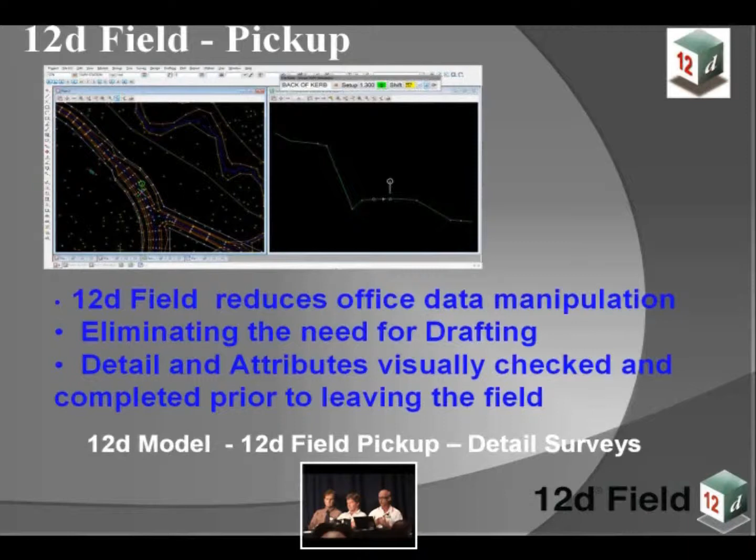12D field pickup reduces data manipulation, eliminating the need for drafting. It can be transferred electronically from designers and so forth, and detail and attributes can be visually checked and completed prior to leaving the field.

With pickup progressing into beta development, 12D Solutions has commenced testing, working with Noel and his crew at the Gold Coast project, and Bundaberg Regional Council with Lindsay Dexter. For detailed surveys, Noel Burton is doing a lot of the map file generation and testing. In coming months, we'll be working with further partners, one I've spoken to today is BCC - Peter Murray from Brisbane City Council.

I'll just jump into 12D. What I've got here is the main menu. I've been told I'm pushed for time, so...

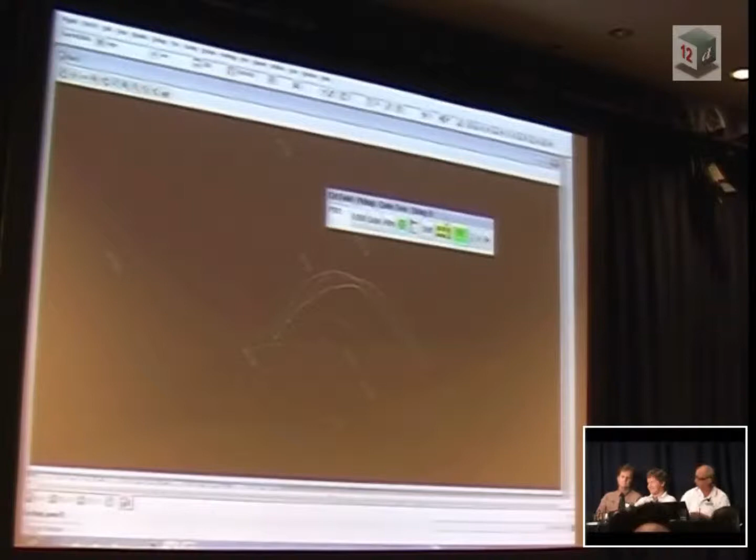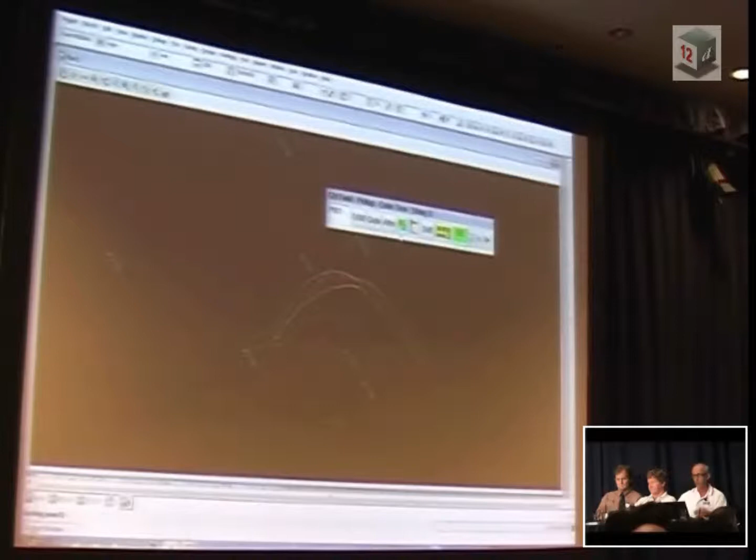I've created a setup. I've got the instrument over there locked on a prism up the back. We can take measurements today to check. You can see here on the screen we have the instrument - we'll just interrupt, go back onto lock, and it will lock back on.

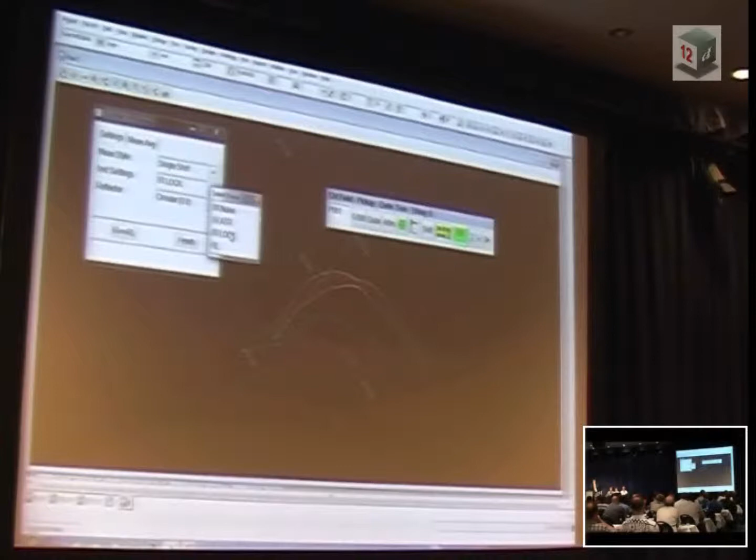The functionality - we can have infrared measurement or reflectorless measurement. In some of the new features coming in version 10, there's a much simpler way of setting up your ATR and your lock. We've got lock on there, so I'll just switch into reflectorless and finish that.

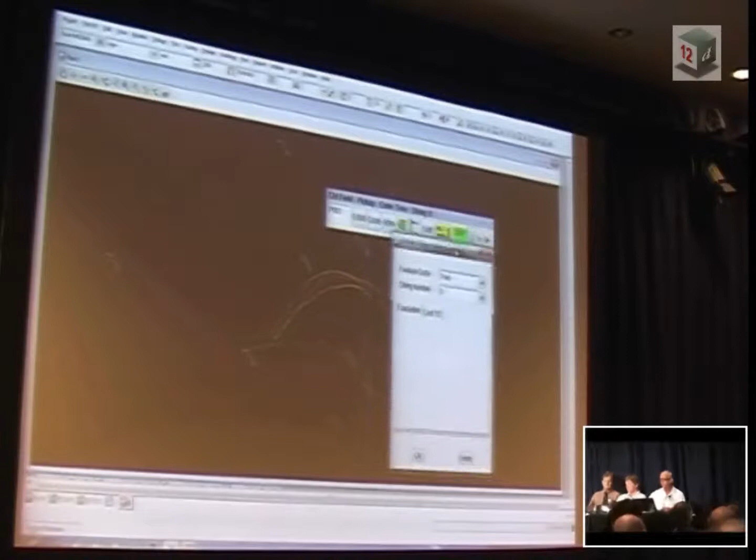With 12D Field, we have a code library. It allows us to create things such as trees. There's quite a number of items on the list so far, and that's growing as we develop the product.

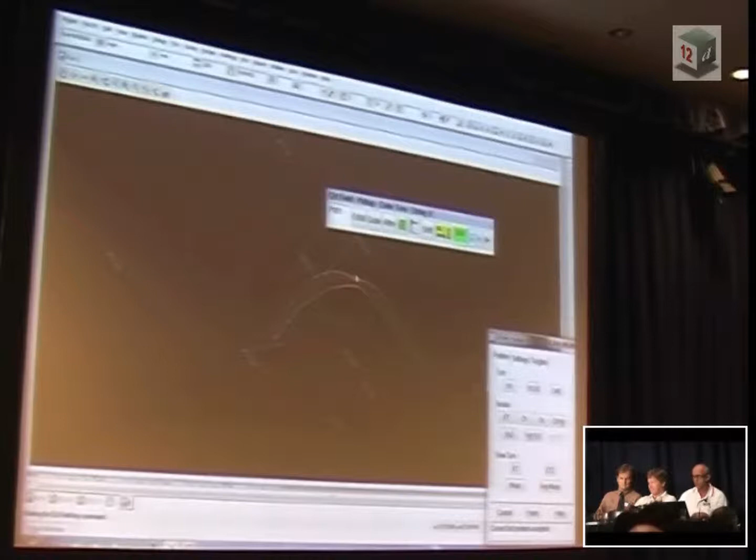I'll drive the instrument across to position of TPS. One nice feature with 12D Field - go to pickup and set it. You can say, I'm standing over here with that little circle, and the instrument will turn around to that position. So no matter if you're working with a raster in the field, you can roughly pick where you are and work from there.

If I take a shot with the instrument, it comes up with the type of tree. We duck into the menu, go to billboards, trees, and pick, say, tree 2 on the trunk menu. For speed, I'll just type it in.

The trunk will say 0.5 diameter. Continue that - the spread. Go for a 10-metre spread on that tree. You can measure that, but I'm just doing it to speed things up at the moment. And the height, of course - you've got the measurement option down here as well.

At the moment I'm just going for the types. The tree height will make it 15 metres high, and continue that. You also have the ability to map the root system and provide other comments for further attributes as you go through the survey.

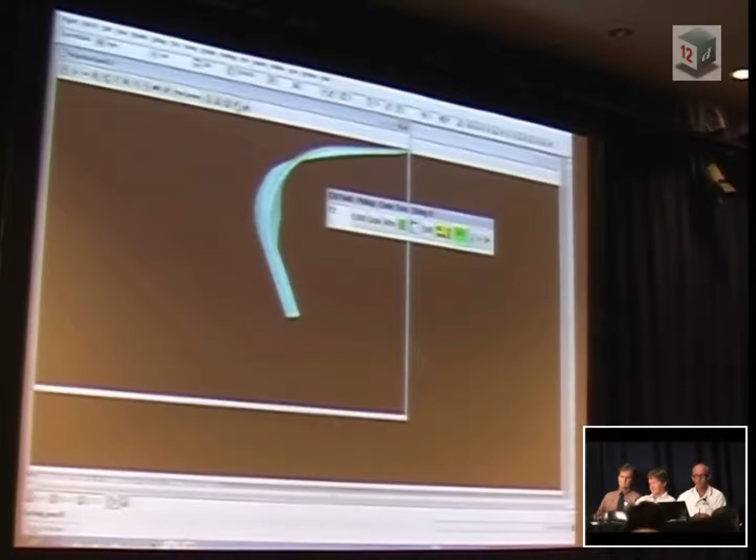Once we continue that, jump into that, and in your perspective view, turn on the model, refresh the screen, and there is the tree drawn.

Some of the options in 12D field pickup - you have station setups, also coming in 12D field setout. You have a standard station, least squares adjustment station, and a station manual. We have the ability to punch in coordinates for the stations, foresight, backsight, so you can traverse it whilst you're doing your pickup surveys.

The ability to record, play, and create template surveys. Opcodes, put in attributes. Shapes will be building up in the future, where you can define a curve shape and then just run that along a single string.

You can edit the field as you go. You can confirm your distances, so if you're measuring to a pole and want to add half a metre or so to get to the centre of the pole, you can add that in. As I said before, you've got the positioning TPS to allow you to turn the instrument to where you're located or where you want to start work from.

The joystick manually controls the instrument, and obviously the status. You can record a note, which is a voice message onto the survey, and we're working towards photos to be recorded onto points and shots as well.

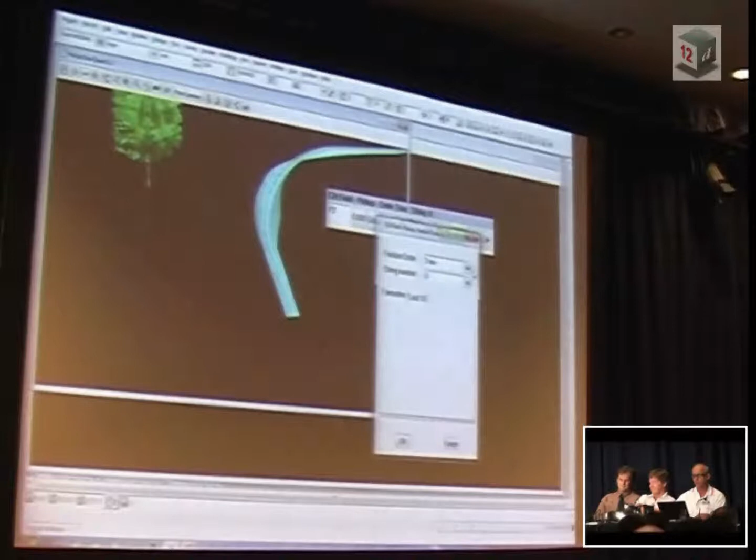So that's the main list. Back to the codes - if I just run into something like a stormwater pipe, created by the invert, give a string number, one. Okay, take a measurement - I've got a pipe under that tree over there.

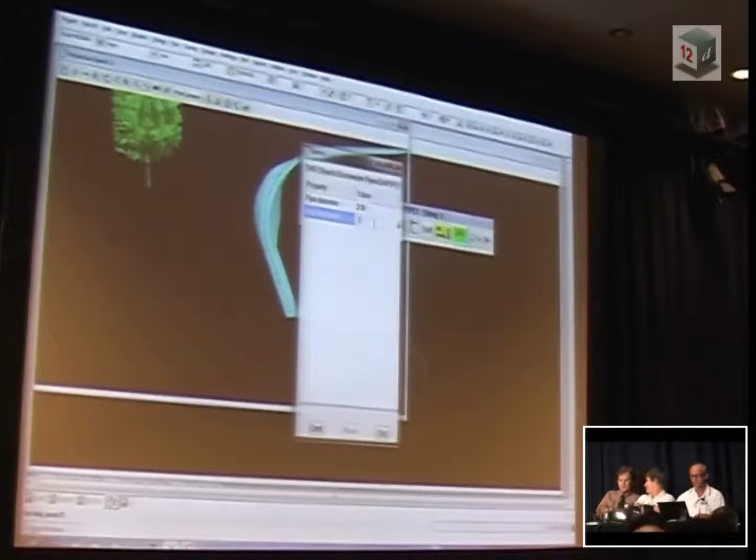Pipe diameter is, say, 2, with a wall thickness of 0.1. Continue - yes. And I'll just move the instrument if I can, to another location.

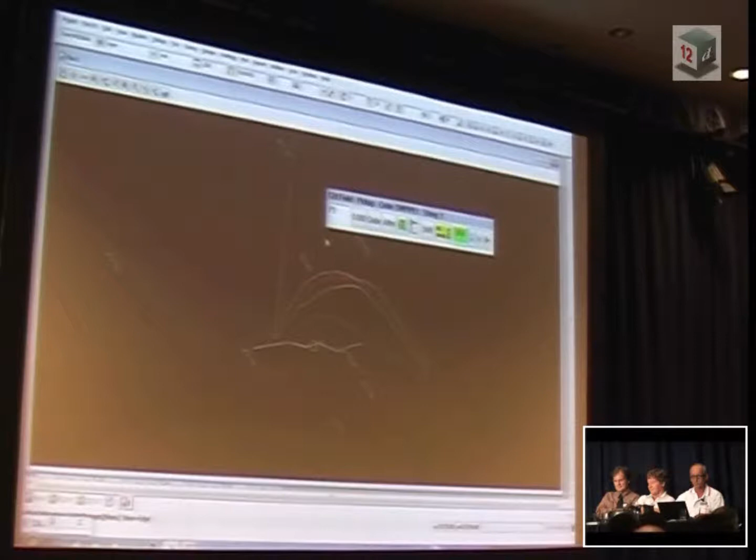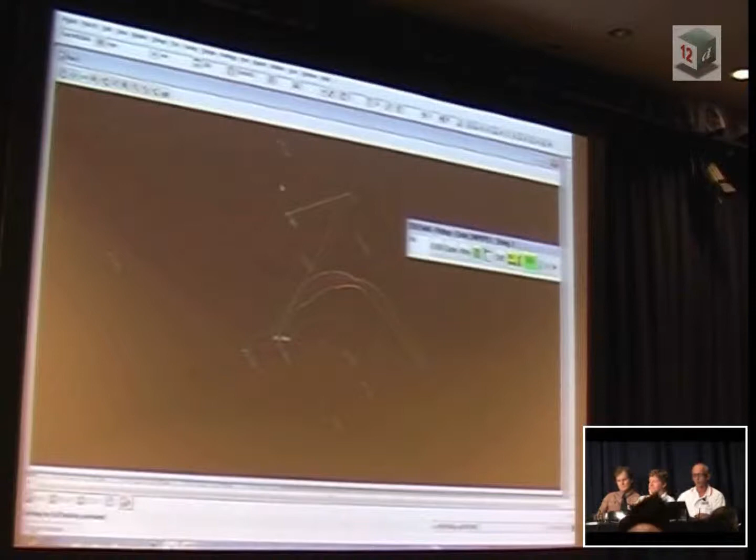Press continue, and then you can turn that onto the plan view. You can see the tree also on the plan view. There's the tree, with the pipe running from the tree, which is a very unusual situation, but that's beautiful. And then you have your pipe sticking out of the tree - very nice detailed survey.

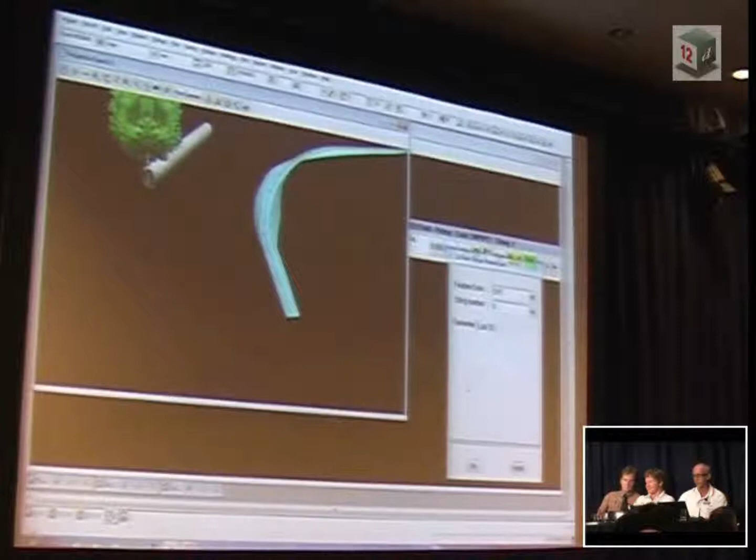We have other things we can add on to that as well. For instance, 12d objects - we can do a circular pit on the end of that position. Take the measurement on that circular pit. It comes up with the same information, which you'll be able to either measure the diameter of the pit, or in this case, because we're running out of time, I'll go for a 3 metre pit. Continue - pit diameter, 3 again. Do a wall thickness of 0.3. Continue.

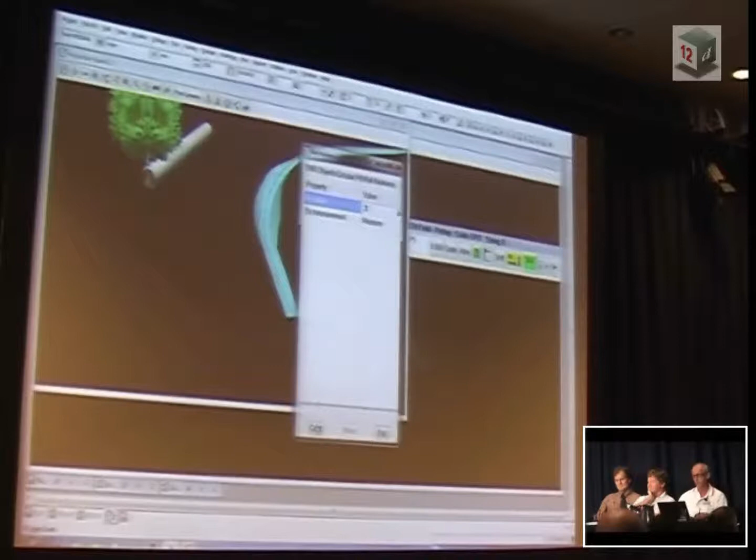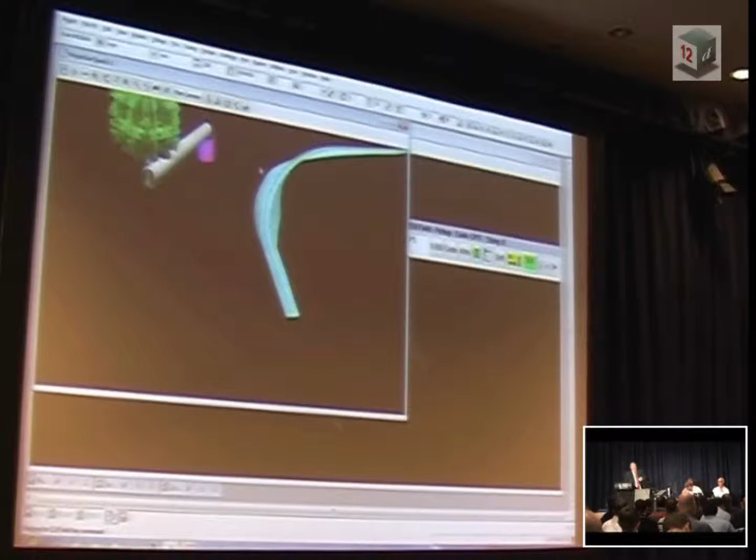So there's one thing to mention here - you have to imagine, while these shots are being done, Graham's got very scared. Alan was supposed to be down there with this garbage bin and the pole so we could have been measuring this. So Graham has chickened out, I think, and decided not to have Alan as an assistant. You're going to try and win the box, you're going to risk it? Yes, we'll go out there, Alan. Let's go out in a blaze of glory.

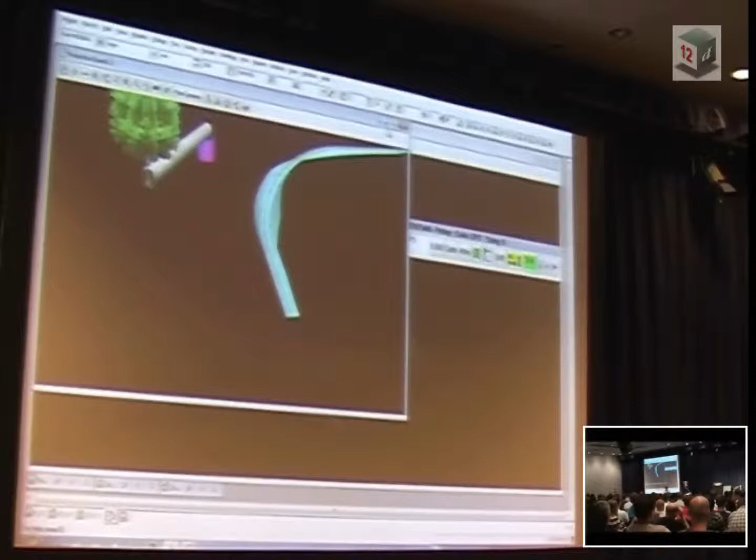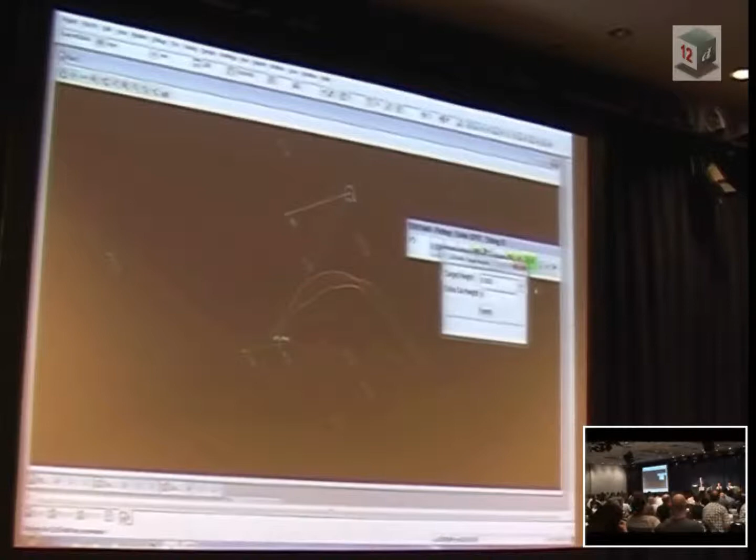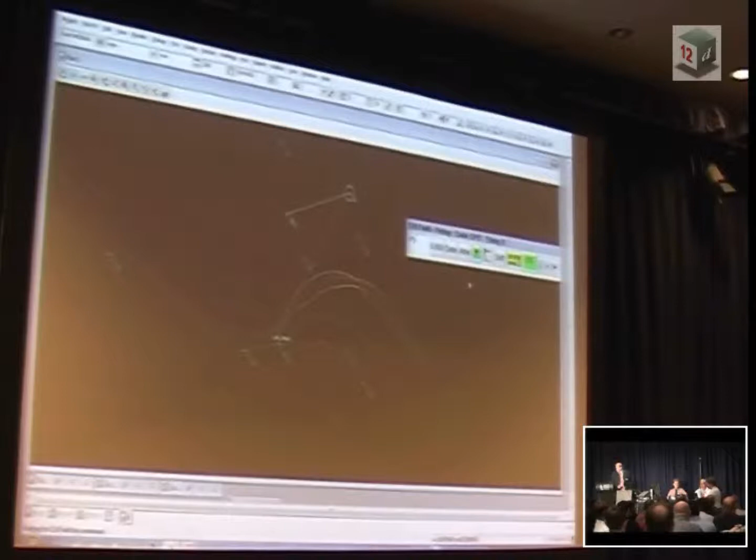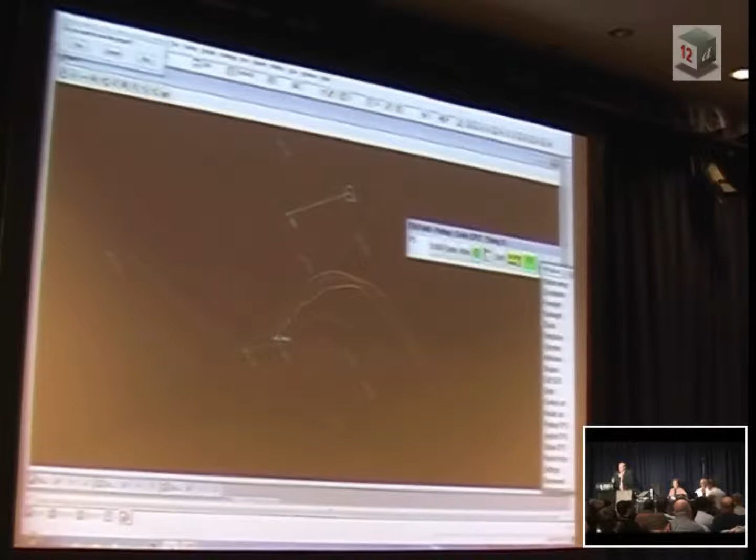Change the pole height to 2.15. Put that up there, which is quite a normal function. We've gone for reflectorless before - we'll just stick it onto your lock, and you'll just actually have to hold that still. If you hold that close to it, the instrument will go even freer. A bit of an oversight there. There's a family prism on the back, so I'm just going to negate that situation - it's quite easy on the very back. Shut that prism down. Now we'll go for you again - hold still.

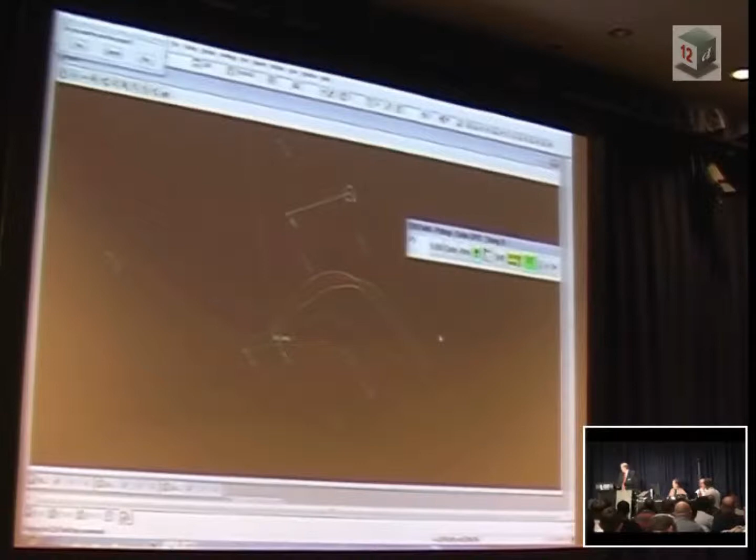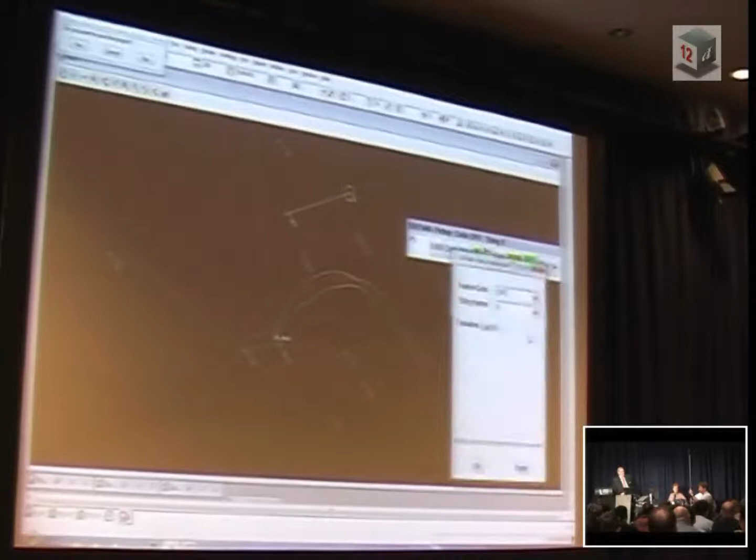Comes up with the pit depth. How deep is the pit, Alan? That's point 3.

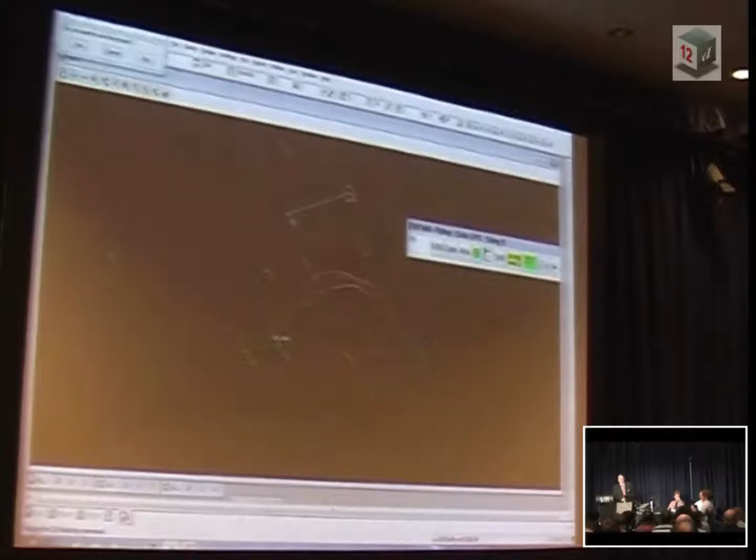You can type it in, or you could take 2 measurements and calculate the diameter for you - diameter of the pit, and the wall thickness is about 5 millimeters. All the things set up here, the questions it's asking, that's all used to define your survey. So depending on what you're doing out there, or how many levels of information you want, that's all set up beforehand, so it only asks you what you want to ask. If you don't want wall thickness, you just don't have that in your thing to ask. And there's our little pit.

Just to summarise on 12d Field, the beauty of it is the office is the field. The user has the previous model for a detailed survey. So if you're going out and picking up where you finished the survey yesterday, you can see it on the screen, set out to that point, pick it up and start surveying from there. So there's no overlaps, no manipulation once you get back to the office when you believe it's finished.

The equipment connection with 12d Field is through industry standards with Bluetooth, radio, Wi-Fi. It's simple, it's easy to use, and there's a future towards it. One day we'll be just out in the field feeding somebody in the office, and that's where we're going. Thank you.